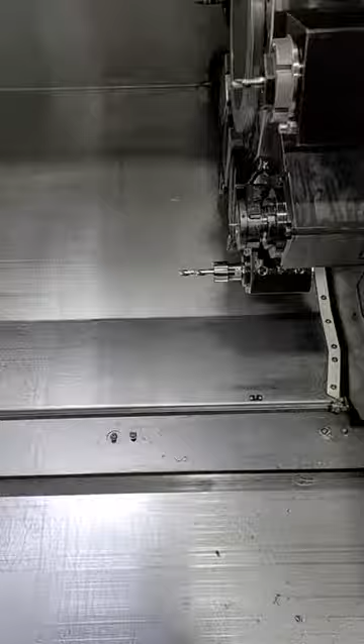So today's video we're gonna be talking about line center and why it's a good tool, and good to actually understand how it works, because there's a lot you can do with it, but you just have to have an understanding of how it works.

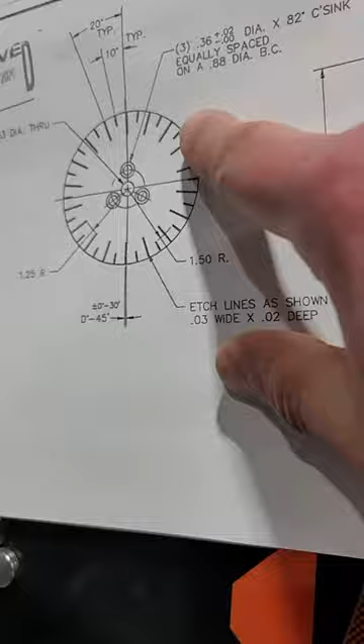So the job that I received looks just like this. Pretty much a whole bunch of these lines had to be engraved. Doing a bunch of lines is not a problem, but there are 36 lines. So we're talking about 36 different units, unless you can do these lines within one unit. And this is what I'm gonna show you how to do.

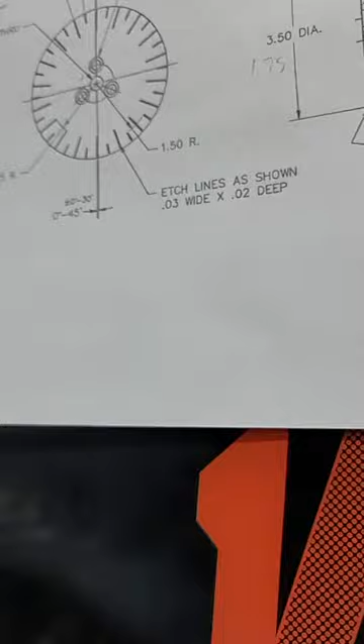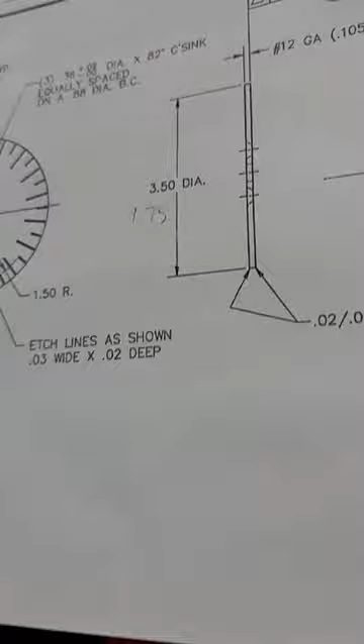So the diameter is 3.5, so we're starting at 1.75, half of that. And then we have 1.5 from the center and 1.25 from the center. So they already give us half the diameter, and they have to be spaced 20 degrees, so 18 of the longer ones and 18 of the shorter ones.

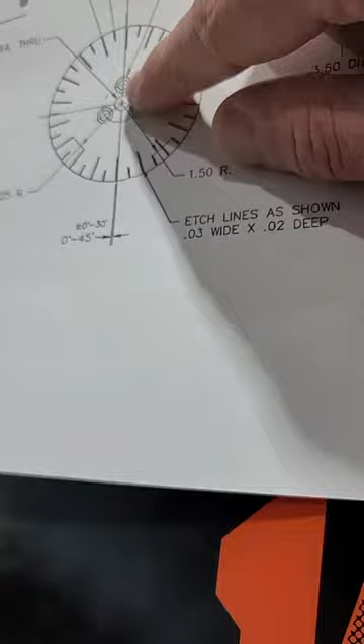Also there's a little bit of difference in how this line goes to the center of the circle. The circle is actually starting at, I forgot, minus or plus 1 degree. And this is a part that's already finished.

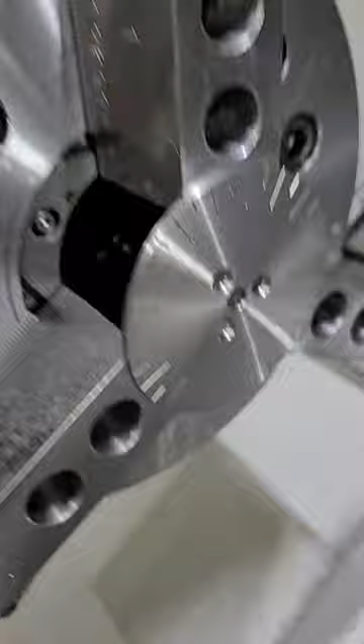I'm using two tools. I tried the 1/32 ball end mill, but I broke 3 of them before I was done with the first part. So my second choice was a carbide center drill, which is really good for engraving as well. This is number 1, which I use for finish, and over there is number 2, which is a little bit bigger, and I use it for roughing.

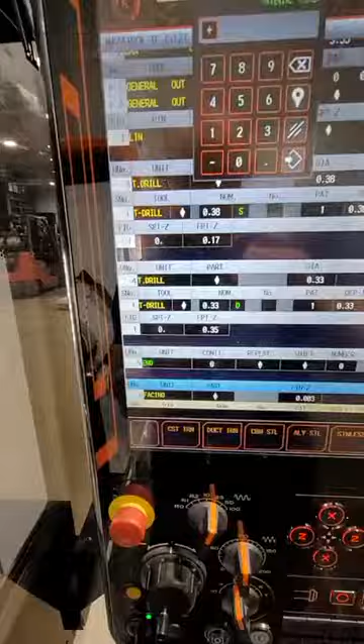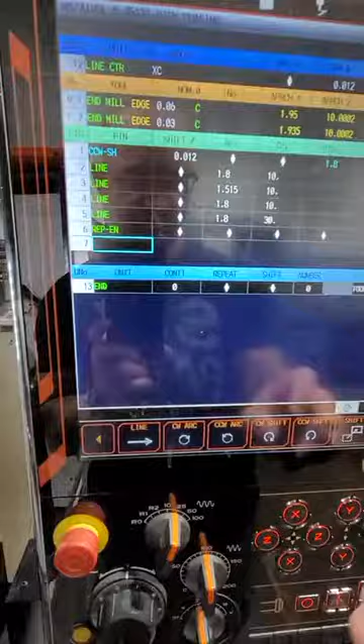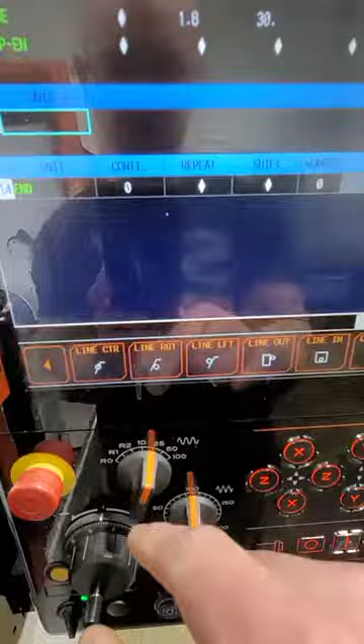Now let me show you the program. I backed it up. This was my first side, so it's all blacked out. This is my second op, line center. To see where line center is, let's create a new program. You have point, line, and face. When you do line, line center is the first option, then you have line right, line left, and so on. Okay, restore, let's erase this.

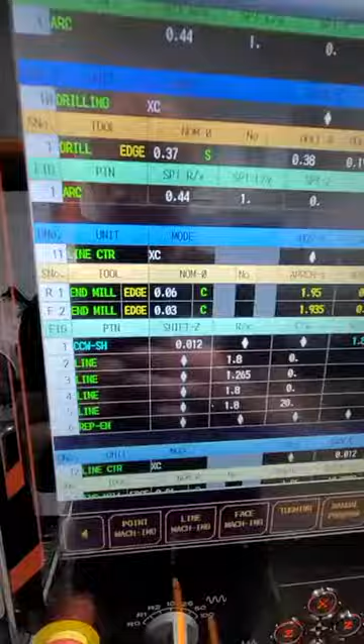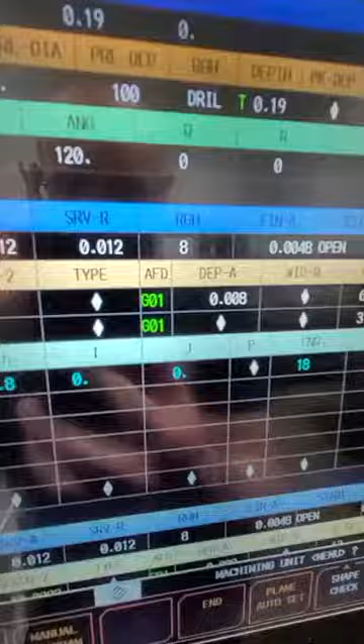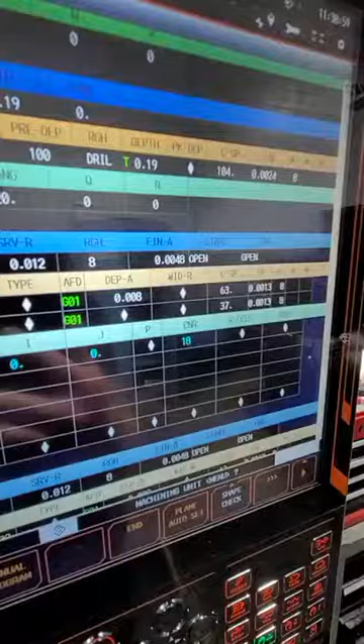Okay, so how does this work? Line center, XC, so it's a face. We're removing 0.012, that's how deep we go. On the radius, on OD, it doesn't matter, you can put a 0 there. Rough 0.008, finish leaving 0.004, and start and end are open. What's that saying? You have open and close. Open means there's no material at the start and no material at the end.

Now my issue was when I was running from 3.5 to 2 and 2.5, when it was open, it would come down here and then go another 0.170 lower, and then come out. When I switched to line close, it would actually jump out 0.170 from the bottom.

So how to fix that: you do a line center and go to your dimension. If you only have like 2-3 units, you do the dimension, then you go back about 0.010 or whatever you want higher, and then it retracts back the way it was going, comes out, and that fixes your issue.

Now with line center, it doesn't matter what tool you have. It's only calculating the center of the tool. So if you have a 1/2 inch end mill, you have to compensate for 0.250 all around, because it only cares about the center. So even though I have center drills, in my tool data it says it's an end mill.

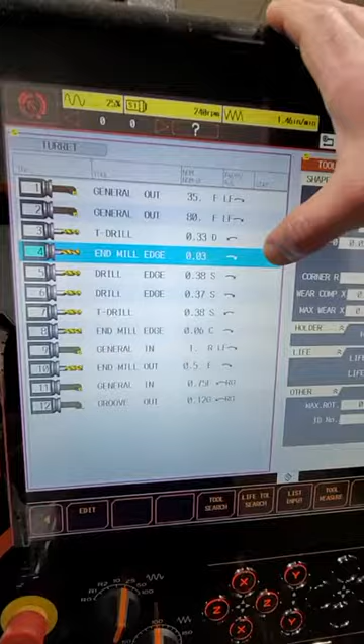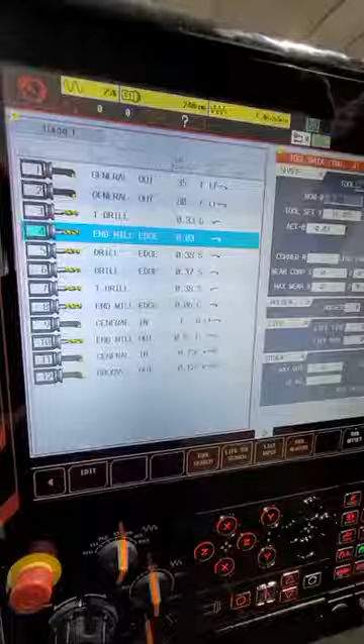For the rougher, number 2, which is bigger, I put 0.060C, and for the finish 0.030C, so I know it's a center drill. But they're still described as end mills because some options are not available for center drills, so you have to call it an end mill. But it doesn't matter, because like I said, it only reads the center of the end mill.

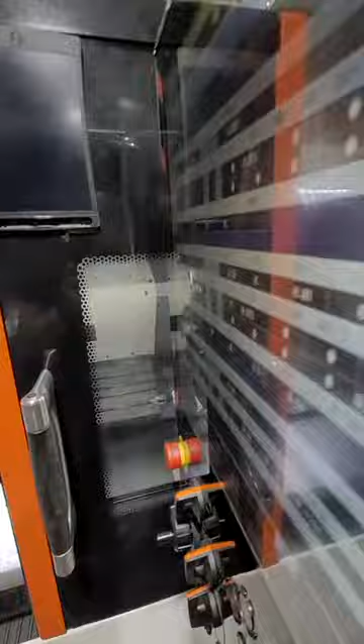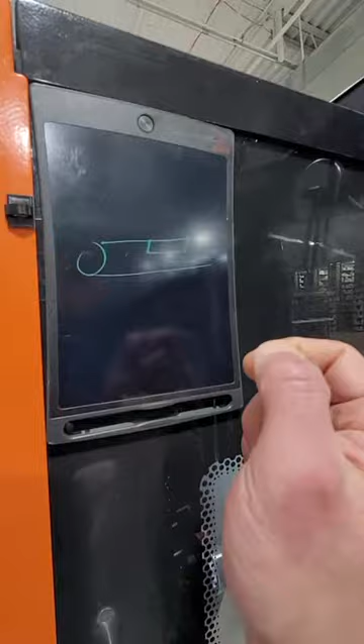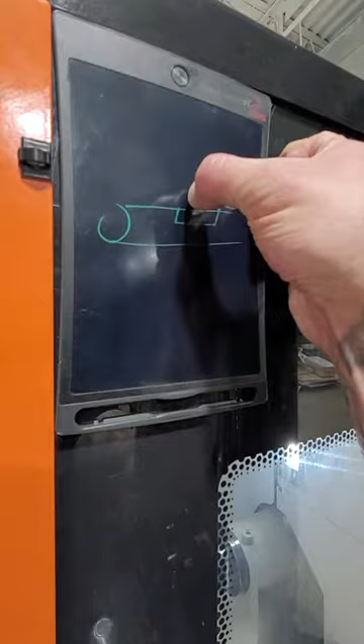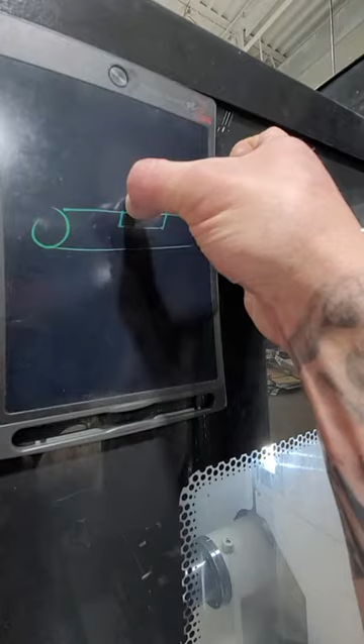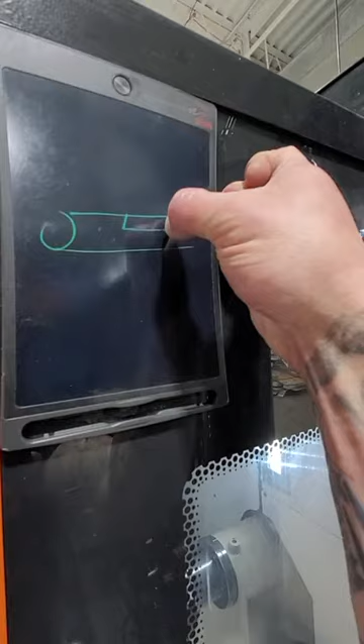because at 1.75, with the 1/2 inch end mill, it would already be here, then come down and go back. If this were 0, you'd go back only to 0.25, because with the other side of the end mill it would already be at 0. So you have to compensate for everything. With line left or line right, it does it for you.

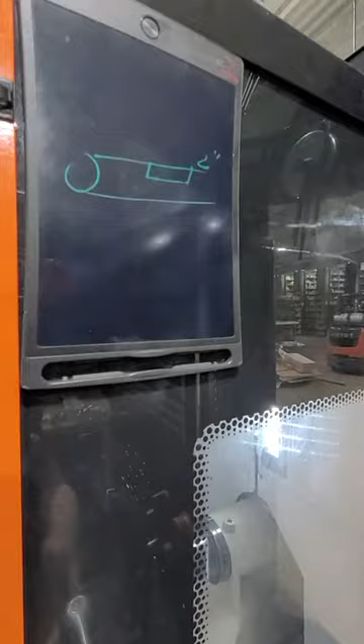But with jobs like this, you can just come straight down and come out, and you don't have to go back or try to open it, and the machine's not trying to compensate for the width of the end mill or anything. So literally, it'll do whatever you tell it to do.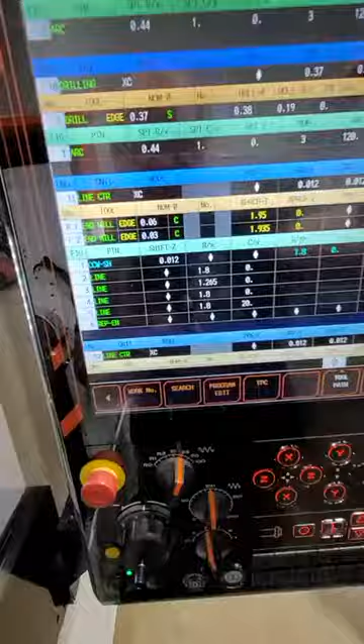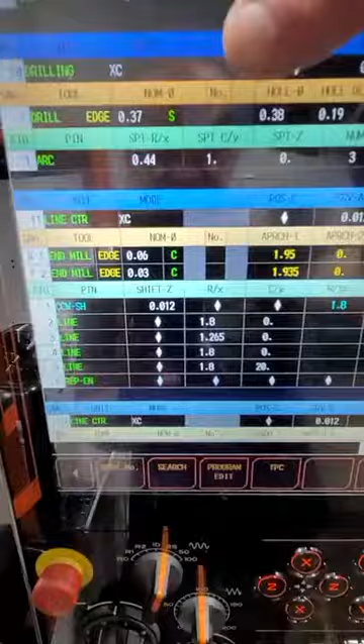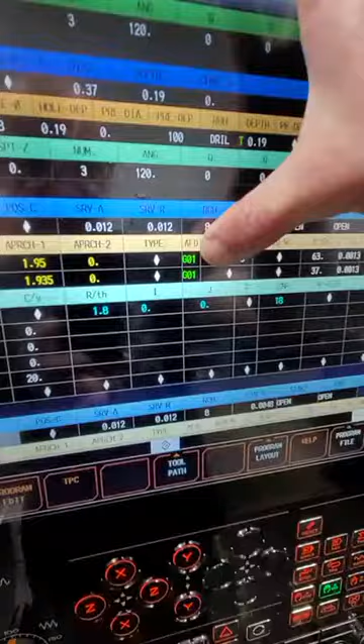So how the program looks. Okay, so let's go back. So we have that line circle, you know, open, so that's what it is. I picked the end mill edge, so 60 thou, so that's going to be that big center. 30 thou for the finish, that's a small center. Approach, that's a question mark, so she calculates how she goes in, so you can go with the feed or with the rapid. So I went with the feed.

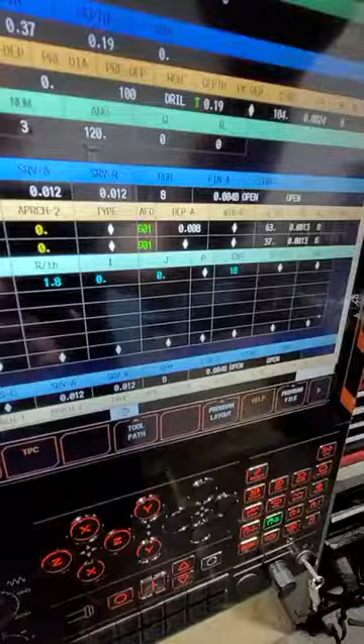So nice thing about this, when she comes down, she'll start above the part, feeds in, and then starts to come down. Okay, and then how deep we go. So the total depth we go 12 thou, so it's going 8 thou with the rougher, leaving 4 thou for the finish, and then your speeds and your feeds, so we already know that.

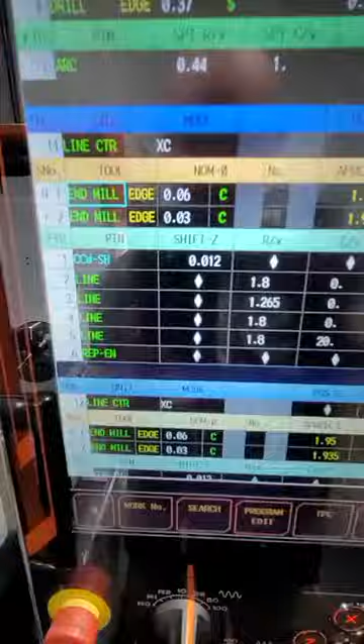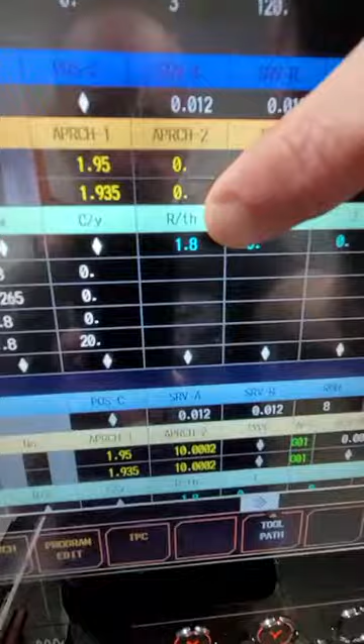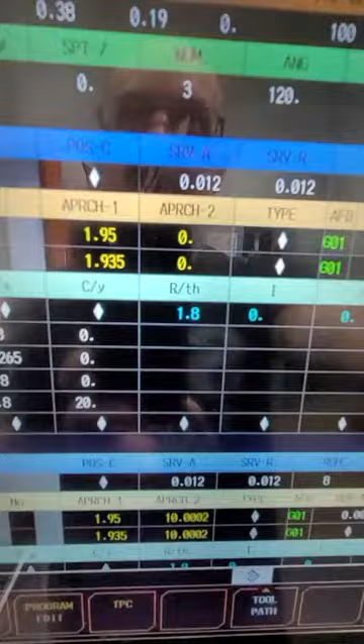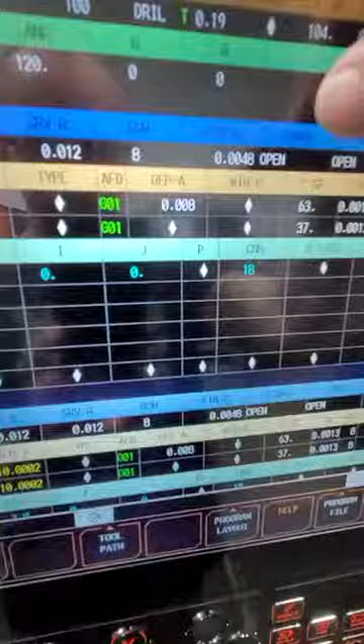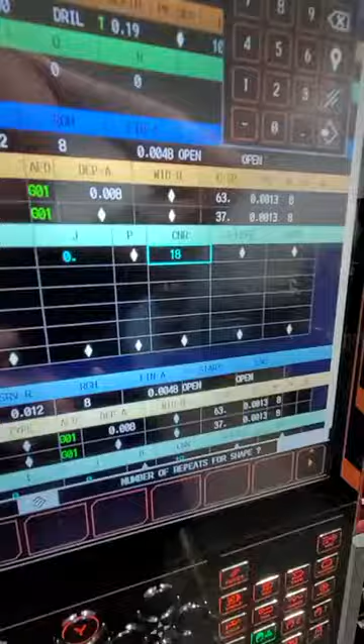And then I and J 0, 0, and over here in program edit, it's number of repeats for shape. Okay, so we did 18 because we have 18 of those longer lines and 18 shorter ones. And now we're doing first line. So first line is we're starting at 1.8. Okay, so a little bit above here, this drawing.

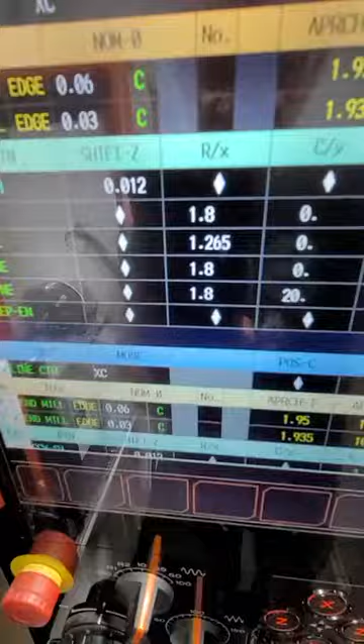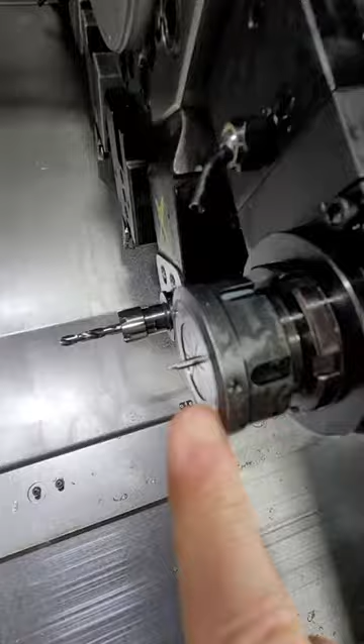Okay, and now we're telling her to come down to 1.265, and like you see it's 1.25. And why is it 65? So I tell her to stop a little bit earlier, because remember that center drill, that tip, it has about 30 thou diameter. So I'm telling her to stop half in the center, because if I would go to exactly 1.25, that diameter will be already lower, because of the diameter of the tool itself.

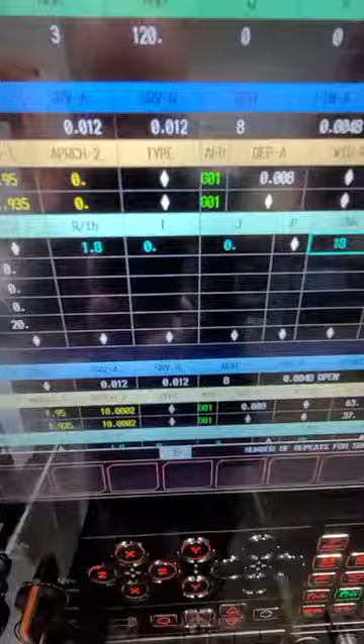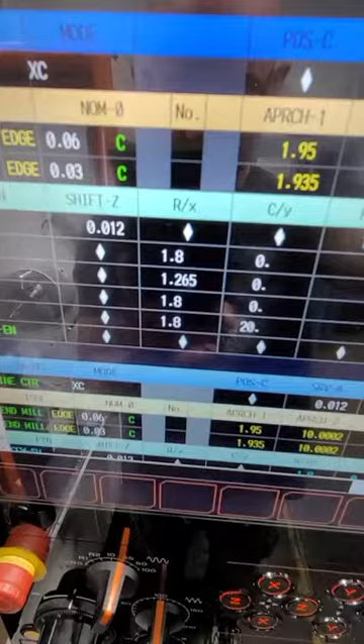And I'm telling her, so we have that line, and everything else over here is empty except that 18 in a CNR. Okay, so we're going to 1.8, then we're dropping to 1.265. We are going back to 1.8. Okay, and then we're telling her to stay at 1.8 and shift on a C 20 degrees.

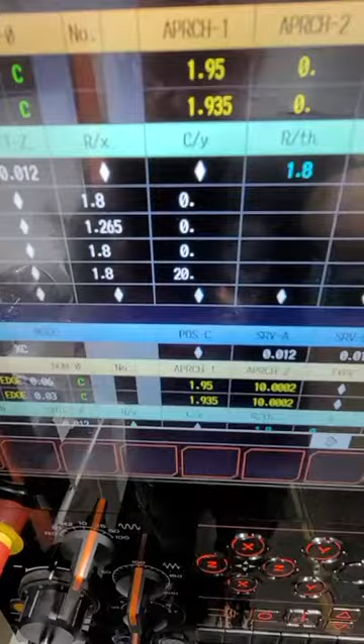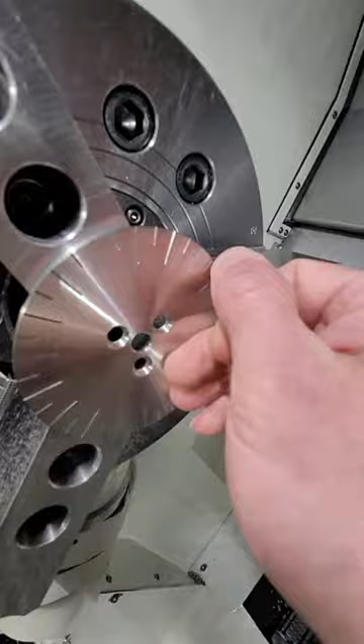Okay, so 20 degrees is because it tells you the big one from 1 to 1 is 20. Okay, so essentially what she does is she starts a little bit above, she comes down here, she goes back same way she came in, goes a little bit higher. And the reason we're going higher, because when she's switching, she doesn't switch on the radius, she switches kind of on a flat line. Okay, so we do not want to hit that top.

So let's say if you would use a 1/2 inch end mill, you would have to come out even 250, like even 300 thou higher. So when she's switching over here, she doesn't hit that top and remove some of your OD material. And like I said, she's inside the material non-stop, so she's not coming out. She's coming out here, coming down here. She goes, and this is where the unit is over.

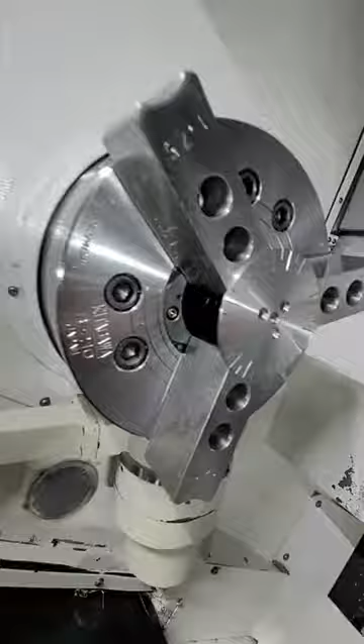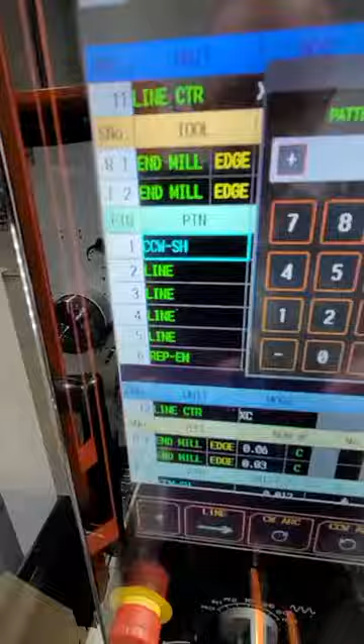Now she's telling the machine, repeat that 18 times. Okay, so she flips the jaws and repeats 18 times. 1 and then 2 and then 3 till she's done. After 18 times she's done. So usually that's what this is, counterclockwise shift that line, and then at the end you have to add repeat end, to go back 18 times.

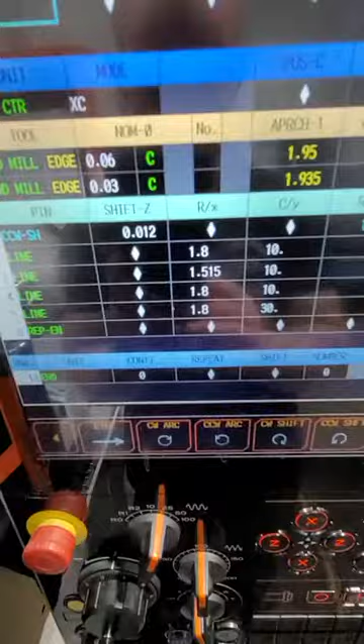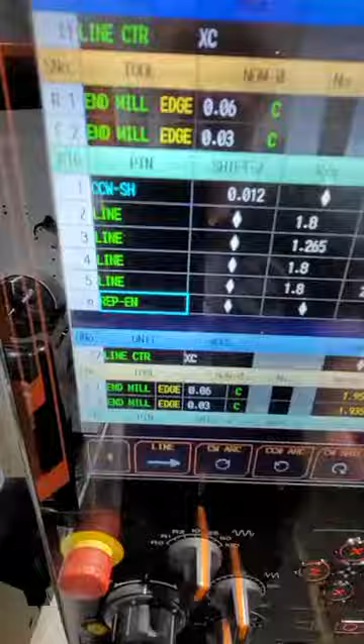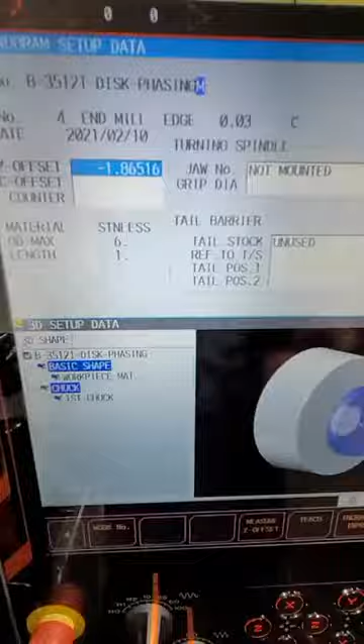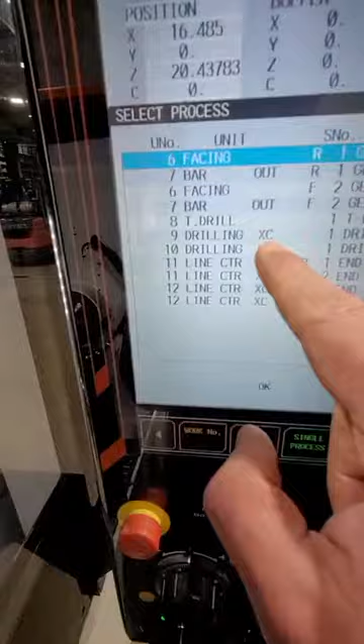Now the shorter one, it's going to be exactly the same thing, 12 thou deep, except now we're going to 1.515, 18 times. Okay, so I'm gonna shift to 0. Let's see, by 0.030. Okay, increment from the 0, coolant stop, memory, single. So we have that center line. So we do have a rougher and finish.

So let's see how she does it. Okay, coolant off. The part was already out, so she's gonna probably start in a different spot. Comes above a little bit. Now she goes to the next. She jumps to 20 degrees over, and she's starting the same thing again. And it doesn't matter. You can do a counterclockwise. You can do a clockwise. All it's gonna do is shift the other way. And shift again.

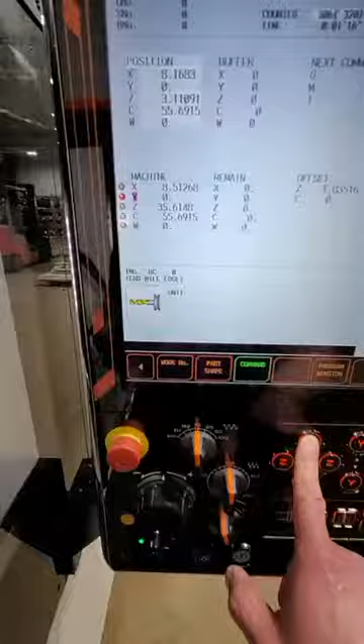So like I said, this is a really good option. You can do the repeat end with the stab. I did a sprocket before. You can do it with line center, and like I said, you do one line, and you're off. So let's stop, home. Yeah. So not much to it.

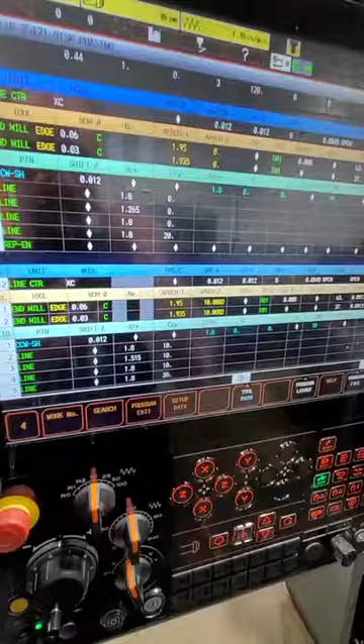And like I said, always first, like on this one, I had about 80,000 stock. So what I did was I barely skim cut it. I did my first try. I measured. I saw that I went too deep, about 15,000. So I backed it up a little bit. And on my second try, I already knew everything I have to do. Everything was adjusted. And this is how you do your line center.

So like I said, you can do lines, you can do pockets, you can do a lot of cool stuff with this, because she will follow whatever you do. So you just add lines, and the repeat end and shift, you can implement in a lot of things. This is the second or third time I've done this. That's why I figured this is going to be good material for a video.